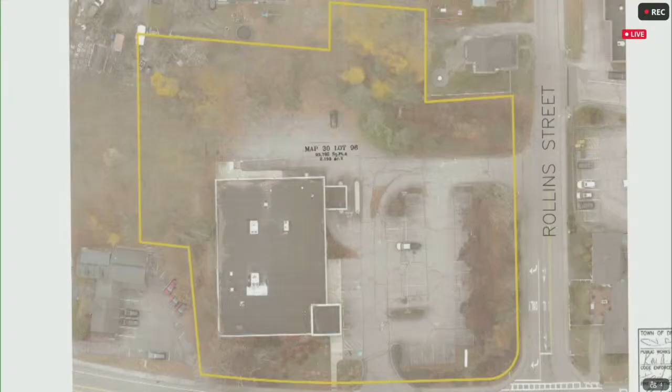And I guess I would recommend that you make a determination with regard to regional impact. I don't believe we had any waivers associated with this project, and we would recommend approval. Okay, no waivers, that's good. Sounds like we can accept jurisdiction then. Who wants to make a motion?

Mr. Chair, I move to accept jurisdiction of the amended site plan before the board for Ashley Drive Development, LLC, PID 30096, 18 Crystal Avenue. Second. Moved by Malaby, seconded by Pelletier to accept jurisdiction. Mr. Chase? Yes. Mr. Wood? Yes. Mr. Minovini? Yes. Mr. Mousy? Yes. Mr. Churchello? Yes. Mr. Pelletier? Yes. Mr. Malaby? Yes. Chair votes yes. And on the determination of regional impact?

Mr. Chair, pursuant to RSA 36:56, the board finds the proposal as presented at this time meets the definition of a development of regional impact. Second. So moved by Malaby, seconded by Pelletier. We will start off with Mr. Chase, who always sets us right on this. No, this is an existing retail structure that is only being redesigned for multi-tenant use and does not meet the definition of a regional impact.

Mr. Wood? No, for the same reasons. Mr. Minovini? No, for the same reasons. Mr. Mauzy? No, for the same reasons. Mr. Chiricello? No, for the same reasons. Mr. Pelletier? No, for the same reasons. Mr. Malaby? No, for the same reasons. Chair votes no for the same reasons.

Can I have a motion to open the public hearing? So moved. Second. Moved by Malaby and seconded by Pelletier to open the public hearing. All those in favor say aye. Aye. Public hearing is open. The applicant is invited to come forward and give us their executive summary.

Okay. And then one more quick question. The photo that I'm looking at here, the front that actually faces Crystal Ave, are you doing any plantings or whatnot over there? That was a little bit rough when Rite Aid was there. As a matter of fact, we have the same landscape architect from when this was originally designed, and some of it has just been overgrown and really not maintained. So the idea is to not make wholesale changes, obviously without coming back in, but grubbing, trimming back, and making some improvements along the front. We obviously want the visibility. We think it's very attractive, so we want to make sure that really pops.

Yeah. And as was mentioned as they were reading off the plan, there will be additional windows to add sunlight along the side of Crystal Avenue. Oh, okay. Gotcha. And so landscaping those beds as well is going to go a long way to improving the visibility.

And then one last thing, if you don't mind, Mr. Chairman. Like I said, I know the building very well, so I apologize, but the walkway in the front, some of that cement has been neglected over time. It's crumbling and whatnot. I'm thinking you guys are going to fix that up.

Correct. Yeah, we'll be working on the flat work there to expand that. And this is actually a good illustration. Above us, you'll see on the right-hand side facing the parking lot, the proposed tenant doors. So we'll be expanding the flat work there. We will be taking away one parking spot just to improve the access coming in, making that pedestrian friendly, and completely redoing the cement flat work there. Oh, good. Very good. It's very exciting to see something going in there, so thank you.

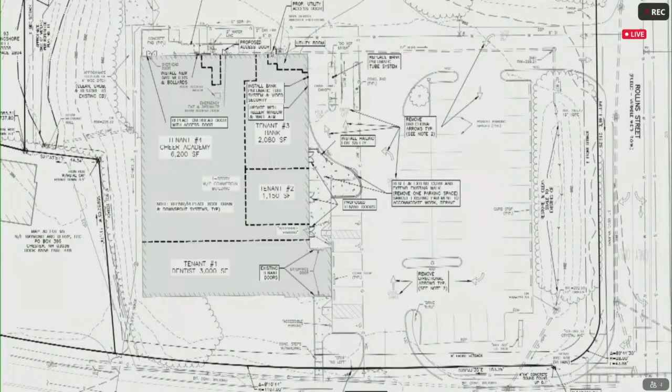That's all I have, Mr. Chair. All right, if there's no more comment or questions, then I'll solicit a motion to close the public hearing. So moved. Moved by Melby, seconded by Pelletier to close the public hearing. All those in favor say aye. Aye. All right, our public hearing is closed.

We move on to consideration of architectural design regulations. Mr. Chair, I move to find that pursuant to LDCR 170-85, the application as presented demonstrates substantial compliance with the architectural design regulations. This property is located in the Central Business District and meets a high level of compliance as outlined in Section 170-84. Moved by Melby, seconded by Pelletier to find the architectural design regulations are complied with.

Mr. Chase? Yes. Mr. Wood? Yes. Mr. Minovini? Yes. Mr. Melby? Yes. I mean, Mr. Mousy? The other. Yes. You said one, no. Mr. Churchill? Yes. Mr. Pelletier? Yes. And Mr. Melby? Still yes. Yeah. Chair votes yes. Okay, findings of fact.

Who would like to move on findings of fact? Mr. Chair, the board finds the proposed plan provides safe and efficient vehicular and pedestrian access, and the design and construction of the access ways and walkways are adequate to accommodate the anticipated volume of traffic proposed by the development. The board finds the proposed parking plan is adequate for the site and meets the parking density requirements for the proposed uses.

The board finds the continuation of the landscape plan from the prior use meets the intent of the regulations. The board finds the stormwater management as proposed is designed to control the post-development runoff so that it does not exceed pre-development runoff. The board finds the utility construction standards are met. The board finds exterior lighting and snow storage provisions are adequate. I move to agree with the above noted findings of fact. So moved by Melby, seconded by Pelletier to make findings of fact.

Alteration of terrain permit and Derry driveway permits are required. So the recommendation is to review the proposed site plan waiver requests and make a determination on regional impact. We feel this plan meets all the regulations. Michael Malinowski of Allen Major is here, as well as the owners of EPSI are here tonight. Mr. Robidoux, are there any of the waivers that would impact our decision on accepting jurisdiction? No. Okay. So let's move on to that.

Mr. Chair, I move to accept jurisdiction of the site plan application for the board for EPSI Inc., PID 08001-002-003, 12 A Street. Second. Moved by Malaby, seconded by Pelletier to accept jurisdiction. Mr. Chase? Yes. Mr. Wood? Yes. Mr. Minivini? Yes. Mr. Mousy? Yes. Mr. Chiricello? Yes. Mr. Pelletier? Yes. Mr. Malaby? Yes. Chair votes yes.

All right. Regional impact. Who would like to make that motion? Before we go to regional impact, do we have any data on what their water consumption will be? My understanding, and Paul can address that, my understanding is there is not going to be a lot of water usage at all. And do you want to take a moment just to explain what you do? Okay, thank you. All right. But you come on up and introduce yourself. Thank you. This is Paul LaBrasse, who owns the company.

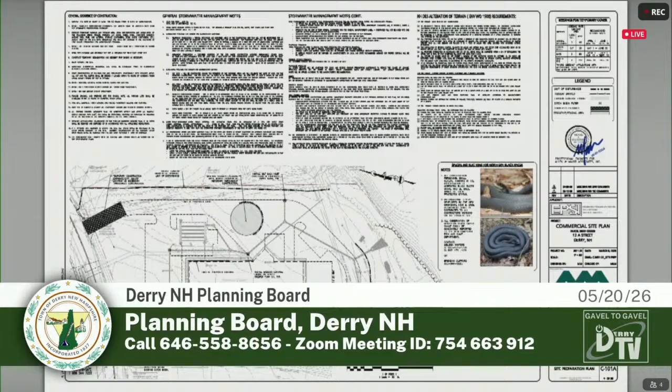You'll notice that we have a 5,000 square foot future addition allocated towards the rear. That would be the same 58 foot high test area. There is a single overhead door into that space. And right down the middle of that is their crane. That would allow them to bring in some heavier pieces of equipment and offload right at that level and bring it into that test area.

We have handicap spots along the front at the front entrance that face A Street, and the primary employee entrance would be the entrance along the top. That is a dual directional entranceway. We do have do not enter signs just after that first driveway to limit customers and employees from interfering with truck traffic along the rear.

We do have an extensive stormwater management system that's been designed, closed drainage system along the front. Towards the rear of the property is a large open basin that will provide treatment and filtration for the water before discharge to the municipal system. There is a smaller subsurface infiltration system located in the top parking area that will pick up roof water, and it's roof water only. And that is to meet the requirement for an AOT permit that is currently pending review at the state right now.

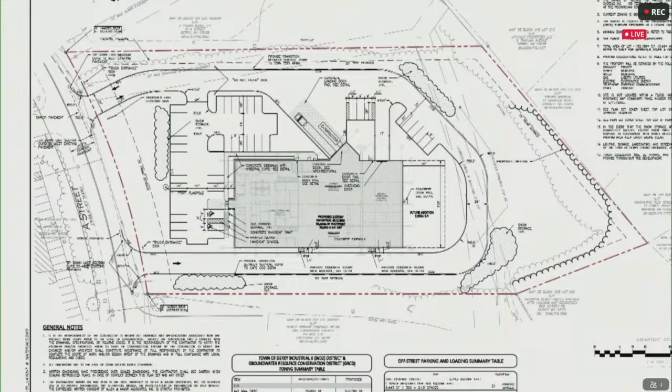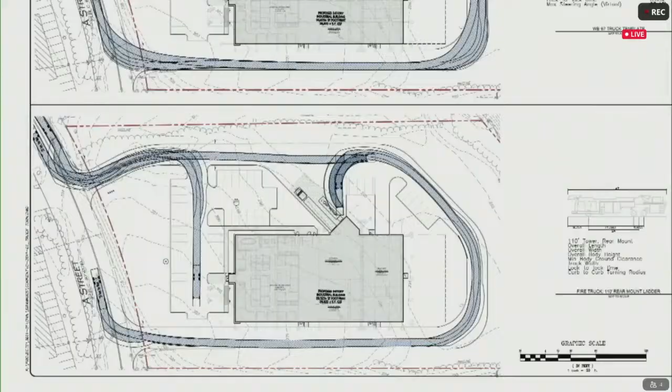We do have a full landscape plan that is provided, so we do have landscape trees that are going along the front. If we can advance to that page, please. I believe that's going to be at the end, sir. You can see the truck turning movements there. We do have a lighting plan that has been provided, so we do show some parking lot lighting. We do make sure that there is zero trespass over the property lines for that.

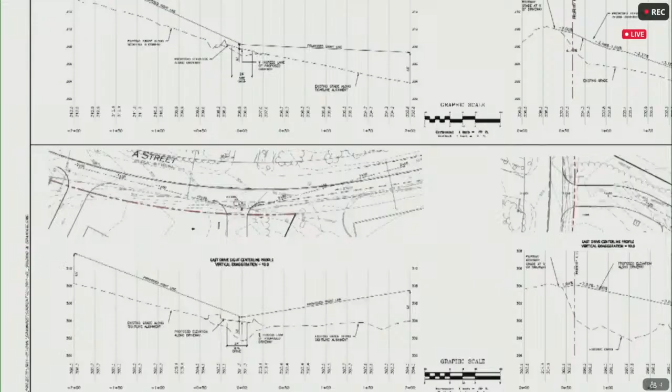Sight distance profiles for the new driveways, all of which meet the criteria that the town DPW has for clear sight distance. Full collection of details. And then our landscape plan. So you'll notice that we do have street trees that are going in along A Street. We also have trees that are going in to shield the parking area as well as the internal islands and throughout the project, which meet the criteria of the landscaping for the town of Derry.

The area will be the back area where we have our basin you can see there. We loamed and seeded with a wildflower mix to help establish that area as well. Happy to answer any questions that the board may have. Any questions or comments from the board?

I just have a quick question. If we get into the waiver portion of the parking, did I hear correctly that the regulations require 52, but we're waiving it and there's actually 47 parking spots? Is that true? Yeah, we require 54, and they're proposing 47. Okay, and that will be sufficient for that? Will we see in the future parking on A Street if there was overflow? No, they're anticipated to have no more than 20 employees at this area, so we've got 47 spots.

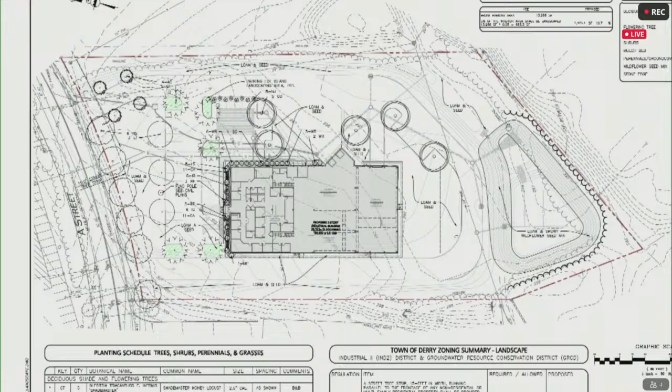Okay, and this isn't on the map that was available in the back there, but it is up on the screen right now. You're putting in some wildflower seeds and loam? Correct. We have a stormwater basin that's going back there. That'll filter the water. The bottom of that pond actually has a mulch. So you're putting a pond in there too? Yeah. It'll be a dry pond, so it's meant to drain in between storms. It's enough capacity, so large storm events, it'll fill up to the top, and then filter, drain, and then tie into the municipal system. All right. That was my primary concerns.

I did have one other thing that came up when the other man here was presenting. He mentioned one of your customers is defense. What kinds of things are you making for the military here? Pressure vessels, that's all they make here. That's really not germane to the site plan process. I was just wondering. I'll ask the applicant not to answer that. Okay.

Any other comments or questions from the audience or anyone online? Mr. Chair, seeing none, rise on the left. Okay, back to the board then. Any other thoughts come to mind? Questions, comments? No? Okay. Motion to close the public hearing? Second. We have a motion to close the public hearing by Malaby, seconded by Pelletier. All those in favor say aye. Aye. Public hearing is closed.

So let's move on to discussion of waivers. All right. So this is the one we're removing the top waiver and then we're adding the one about parking. Mr. Chair, I move to grant a waiver from LDCR Section 170-26.A14 to not provide vertical granite curbing throughout the project in lieu of either slip-formed concrete where VGC is required, and for use of Cape Cod-style curb along the perimeter as shown on the plans. After review of the waiver request, the board finds the strict conformity of the regulations would pose an unnecessary hardship to the applicant, and the waiver would not be contrary to the spirit and intent of the regulations.

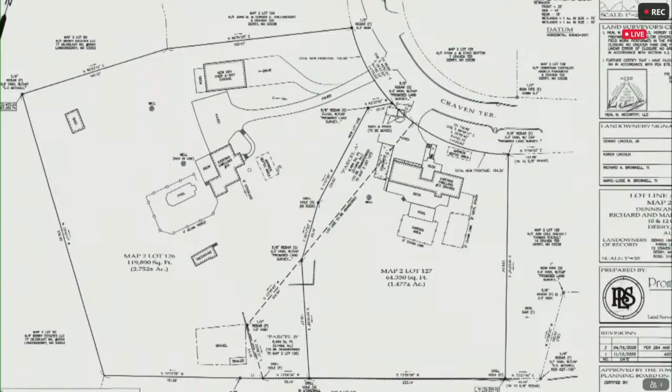Oh, no, it's not that we didn't want to do it. It's just very tricky to make it work with as few angle points in a line as possible. Instead of a bunch of them, we try to minimize it. And already it doesn't create a super odd shaped lot, but it's also a little bit odd shaped. Anyone else want to weigh in on this one? No? I will also say that it also doesn't follow our recommendations that all lots be rectangular, so there's that.

All right. Are we done on that question? Yeah. Motion to close the public hearing? Second. Okay. All those in favor say aye. Aye. Motion, public hearing is closed. So now we can actually formally discuss that point under the waivers. Mr. Chair, I move to grant a waiver from LDCR Section 170-25-2 to allow a lot line that is not a substantial right angle to the street. After review of the waiver request, the board finds that specific circumstances relative to the plan or conditions of the land in such plan indicate that the waiver will properly carry out the spirit and intent of the regulations. Second. It has been moved by Malaby, seconded by Pelletier, to grant the waiver as requested.

Any formal debate now that we're actually in the motion? No? At the risk of asking a foolish question, shed and fence to be moved, what's the timeline to move this? I'm unaware of that. Yeah, I'm not sure that's actually part of our jurisdiction. Right now, they have a driveway that's encroaching, and if after the adjustment they just have a shed that's encroaching, maybe that's an improvement, I don't know. I'm more concerned with the driveway than the shed, especially if you have resale value, you know.

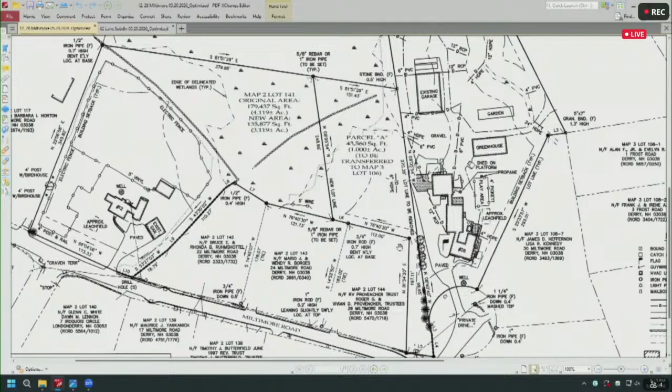The area that will be transferred is essentially inaccessible. There's a really big wetland between 12 and 28. And the son of the lady who passed, as far as I know, they have a really good relationship, and he carried through with the plan of going through with the lot line adjustment.

I went out and delineated wetlands. There's a significant amount of wetland, which isn't necessarily relevant to the lot line adjustment, but it's of note. And that's all I've got by way of introduction, so I'm happy to take any questions or comments. Questions or comments from the board? Hearing none, are there any questions or comments from anyone in the audience or online?

Mr. Chair, we're seeing none rise online. We have someone with a hand raised. Come on up. Please come forward and give your name and address for the record. My name's Nicole Barrett. So we gotta wait till you get on the mic so that you're on the tape, and the television audience at home can hear you. What? There's a TV audience at home. They need to hear you through the mic. Okay. Yeah, thank you. My name's Nicole Barrett. I'm at 32 Miltimore.

And I will just straight off admit that I don't know too much about these. I guess my only question, and I didn't have a chance to talk to my neighbor, is there any change in land use or anything with that gaining an acre? None proposed. It's in the same district, it's the same use. So there's nothing. Okay. That was my only question. They're just going to keep mowing it like they've been doing, as far as I know. Yeah. They had horses there years ago, but they haven't had animals over there for many years. Okay. That was it. Okay, thank you very much. Thank you.

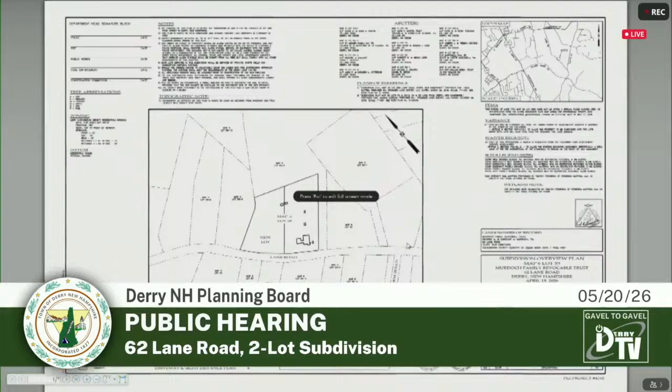This one is the Murdoch Family Revocable Trust, PID 06059, 62 Lane Road, for a two-lot subdivision. Okay. So the proposal is for a two-lot subdivision of 62 Lane Road. The property is located in the low-medium density residential district, which requires a minimum lot area of 2 acres and 150 feet of frontage. The proposed frontage exceeds the requirement. A variance was granted on February 5th of this year from the provisions of Section 16547B1 to allow the creation of 2 lots with less than the 2-acre minimum. The proposed lots are 1.85 acres and 1.6 acres.

The lots will have private wells and septic systems. There are wetlands to the rear, which is actually West Running Brook. However, there is a stone wall and a tree line to the rear, which will limit any potential vehicular access to the rear of the property. The proposed lots will be identified as parcel 06059, which is the parent parcel, 62 Lane Road, and parcel 06059-001, 60 Lane Road, as identified by the fire department.

The trees near the proposed driveway will need to be removed for sight distance purposes, and the temporary culvert in front of the proposed lot will be reconstructed to town standards. Of note, Note 6 states the owner can choose to install residential sprinklers. The form of fire protection needs to be specified. The town can't, per state law, require residential fire sprinklers in single-family residential. However, we can require fire protection in the form of a cistern or a hydrant.

This lot is not in the hydrant district, so the choices are limited to the construction of a fire cistern or voluntary installation of residential sprinklers. If the owner chooses not to install sprinklers, the plan needs to be updated to show the cistern area and construction details, or Note 6 could be amended to state the applicant voluntarily chooses to equip the homes with residential sprinklers.

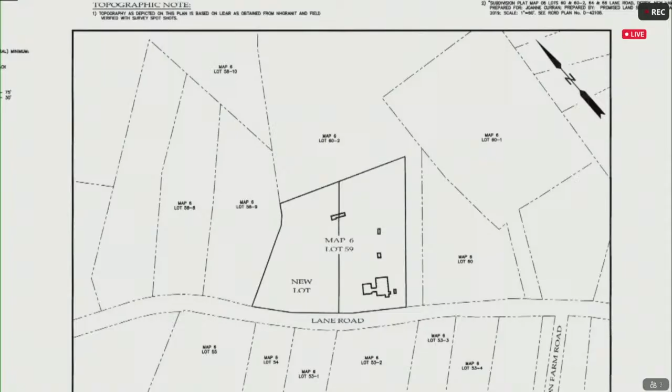But we are, instead of having the septic in the back closer to the wetland and uphill, which was, we inherited this job from another surveyor. We went to the site and performed our own traverse closure, field checks, all of that.

But it doesn't make any sense to put the septic in the back. So the buyer wants the septic in the front. So that's a change from what will occur from what we show on this plan. I kept it like that because we didn't do the original design work. So what will take place later is the well will go to the rear of the house. The septic will be in the front, which makes more sense topographically.

The driveway is really close to 150 feet. The buyer wants to shorten that, but if the driveway is 150 feet or longer, we will propose a turnaround for fire apparatus. I spoke with the buyer today. He does want to voluntarily opt for sprinklers, so that has been addressed. The monuments have been set, the boundary points have been set. And I can't read my other note. So I think that's it for now.

All right, I have a few technical questions. I'm going to start with the drill hole. Is that in a really big rock? It's in a significant enough rock that another surveyor drilled it. They're normally in base rocks, like bigger rocks on the bottom of a stone wall. So you have to move it on purpose, or it's not really movable. But it's a legal survey monument, so we really hesitate to remove those.

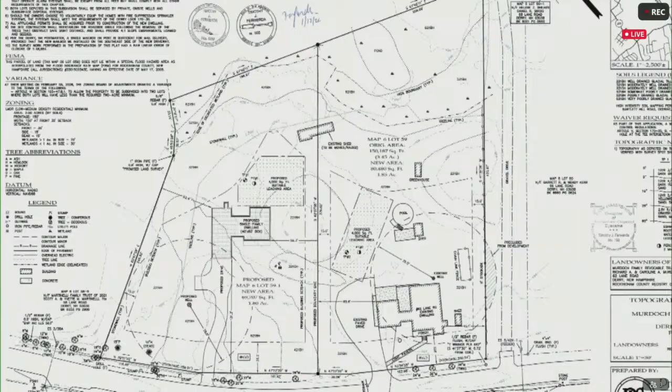Okay. And the well radius is 75 feet because it's below a certain gallons per day for the septic by state rule. So the 75-foot well radius will be in the rear of the lot, none of the septic components will be within that 75-foot radius, and the well radius will be maintained entirely on the subject lot.

Or the well radius can cross the property if it's precluded from development, which means you can't build a septic there anyway. A well radius can cross a lot line if there's a wetland on the other side, because the neighbor can't put a septic there anyway. So that's it. I understand that. I'm just used to seeing firm designations.

Well, I suppose it begs the question, if everyone had agreed that's how things want to be shuffled, why wasn't that revised on the drawing before it was submitted to us? Again, we came into this project later than we wanted to, and later than I knew who was going to buy the property. But after speaking with the person who's going to purchase the property, they wanted to switch it, but it had already been submitted.

It is a little unusual, I agree with Mr. Chase. Do we have an easy way to fix the documentation after the fact that will meet everyone's concerns? I guess I'm going to ask Mr. Fazioli, what's engineering's thought on us approving it without a solid... So usually we do have approximate layouts of the well and septic locations, but the final septic location actually isn't set until it goes to the state, what he was describing before, when they get the actual DES permit.